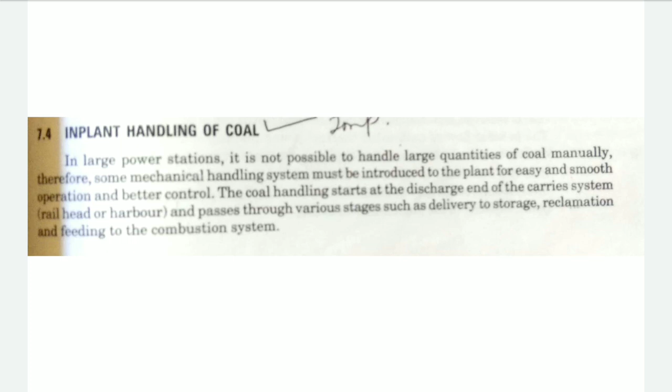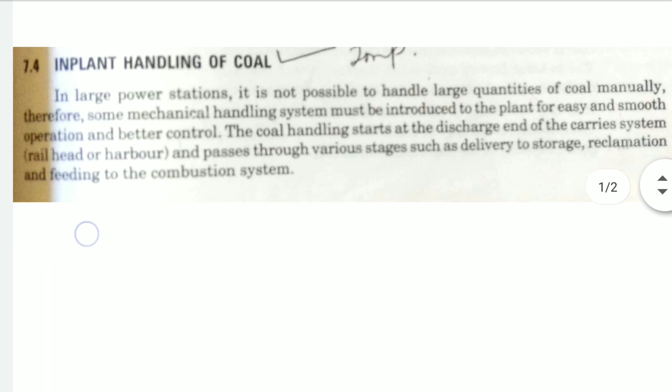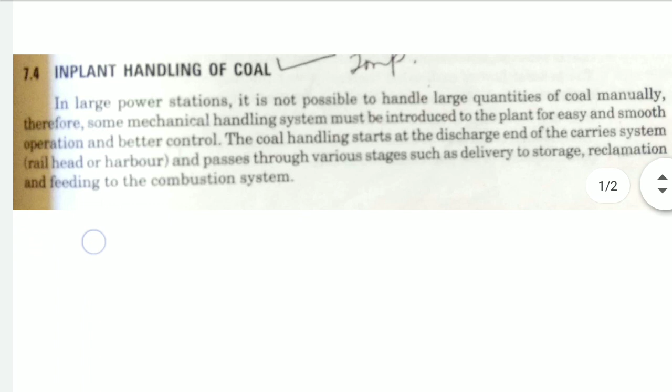In a large power station, it is not possible to handle large quantities of coal manually, so mechanical systems are introduced for easy, smooth operation and better control. The coal handling starts at the discharge end of the carrier system, rail head or harbor, and passes through various stages such as delivery to storage, reclamation and feeding to the combustion system.

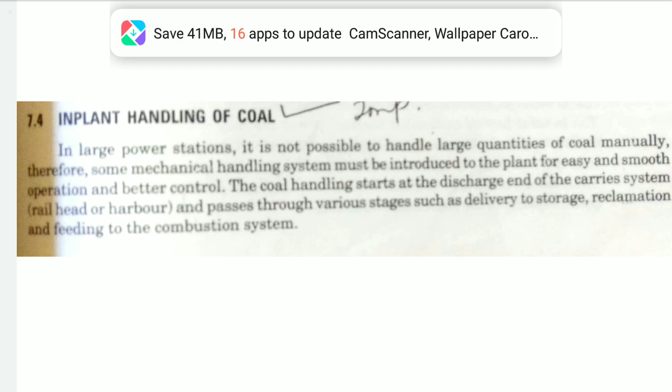Right from the mining there will be transportation for handling - this can be called outplant handling, like by railways, shipping, trucks, or piping. These are the carriers for transportation up to the thermal power plants, and from there the in-plant handling of coal starts, that is storage. For up to a 500 megawatt steam power plant, standby units of coal are required, meaning coal storage is also important as far as handling is concerned.

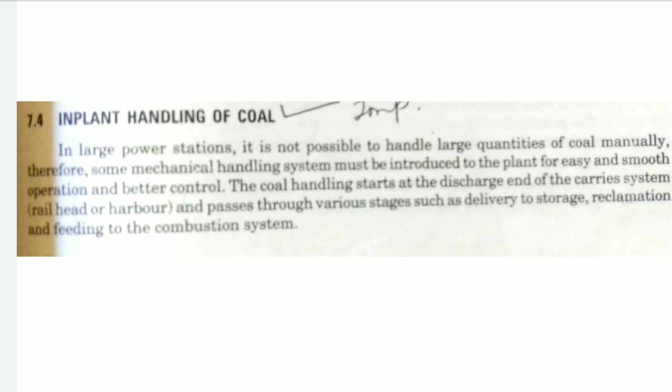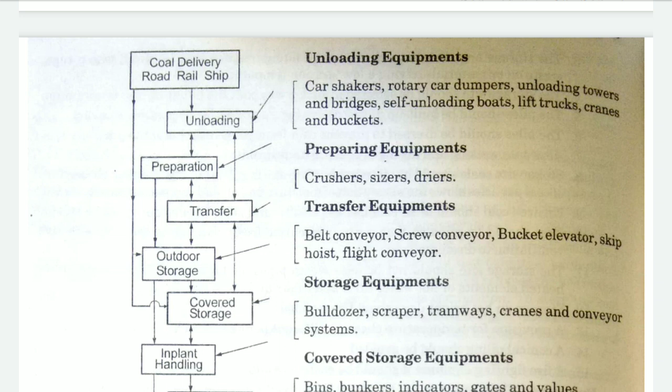After unloading there is preparation equipment to get the proper size of coal for burning purposes - crushers, sizers, dryers - because coal from the mining carries dust particles, unburnt particles, solid particles and moisture. This should be removed, and the large quantity or mass of coal is also not required in such high quantity, so crushers, sizers and dryers are used for preparation of the coal.

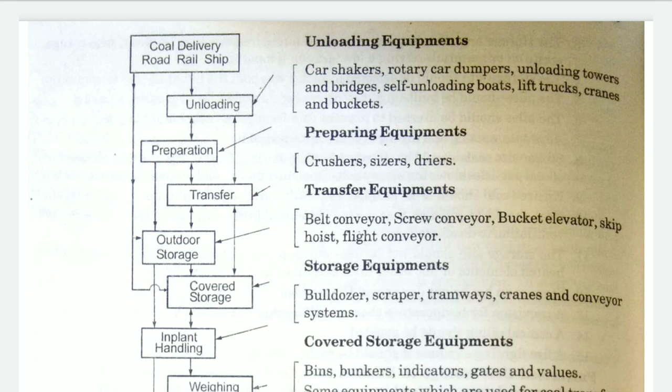After that there is transportation from the unloading site to the storage site. This is done using belt conveyors, screw conveyors, bucket elevators, skip hoists, and flight conveyors - these are the types of conveyors used for transportation. Generally belt conveyors and screw conveyors are much easier for transporting coal from the unloading site to the storage site.

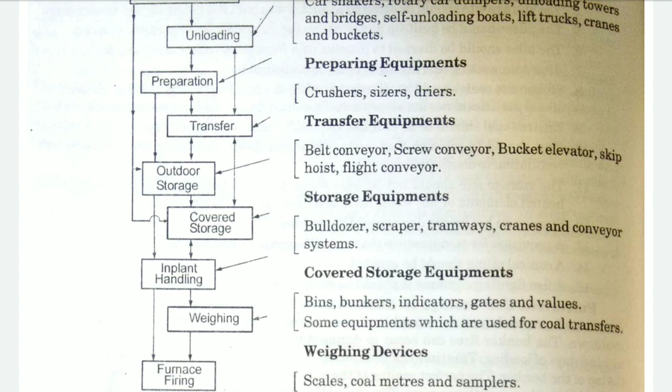Storage of coal can be done using bulldozers, scrapers, tramways, cranes and conveyor systems. Storage may be on open space, or you can store the fuel, that is coal, in covered storage. Bins, bunkers, indicators, gates and valves - equipment used for coal transfer - may also be used for covered storage.

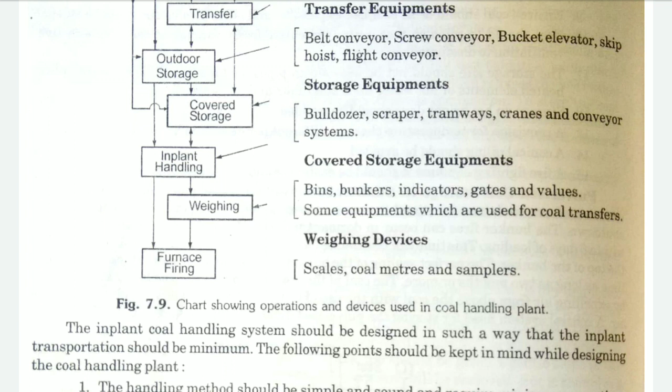After covered storage there is weighing of the coal with the help of scales, coal meters and samplers, because the size of the coal particles should be minimized or pulverized so it will completely burn when fed to the furnace. Our motive is complete burning of the coal in the furnace for high rate capacity.

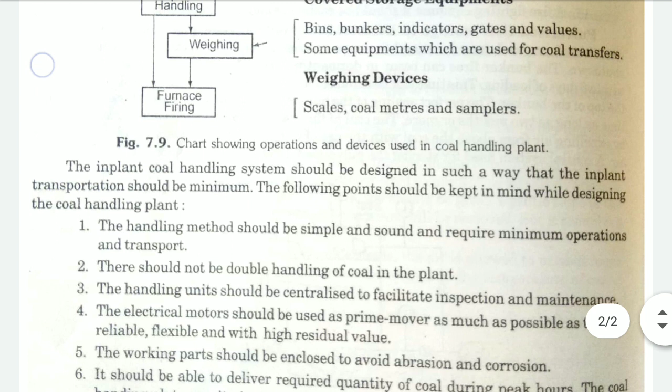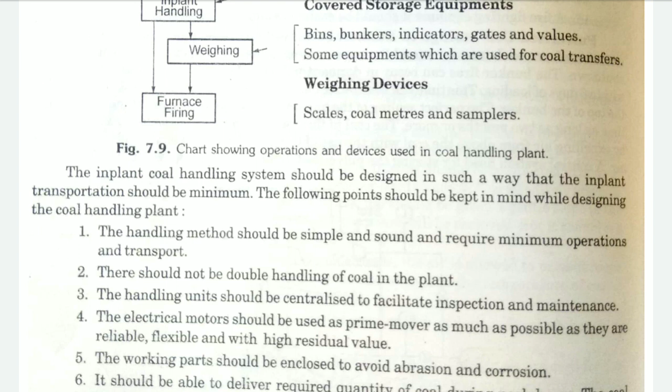So the in-plant coal handling system should be designed such that the in-plant transportation is minimum - this is one key thing to keep in mind. The following points are important while designing the coal handling plant, some of which I will study here.

The handling method should be simple and sound, requiring minimum operation and transport, right from unloading up to feeding the furnace. It should require minimum operations of transportation and handling of that particular coal.

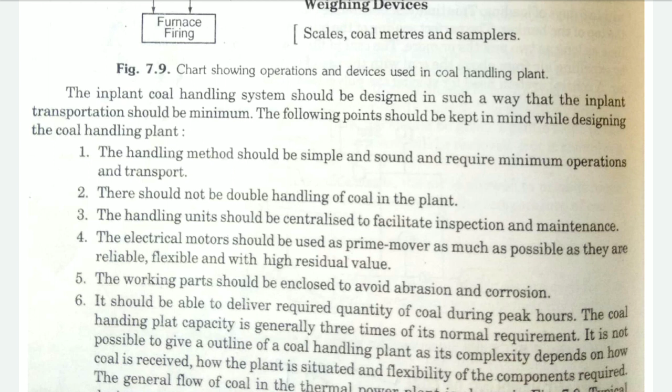There should not be double handling of coal in the plant, meaning the same coal should not be handled twice. The handling unit should be centralized to facilitate inspection and maintenance - all equipment used in the coal handling system should be centralized for easy maintenance and inspection.

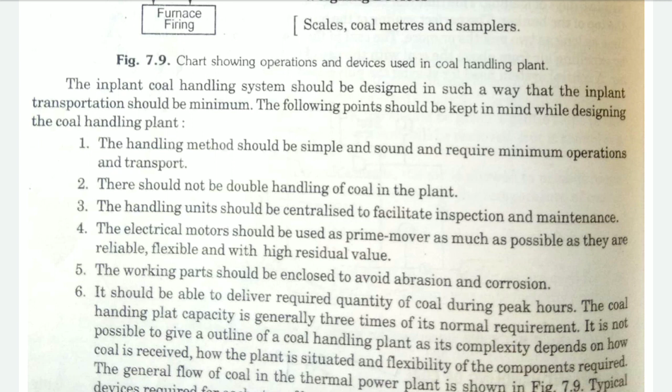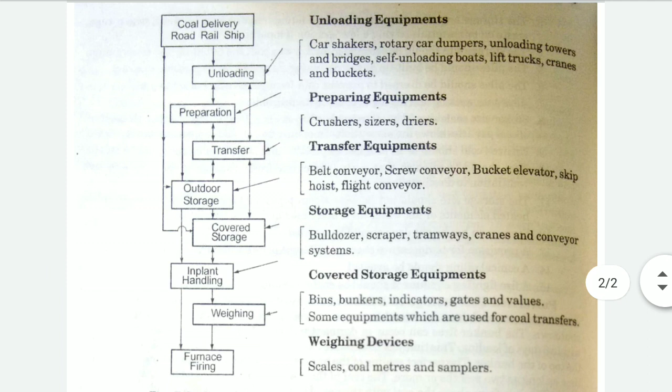Electrical motors should be used as prime movers as much as possible, as they are reliable, flexible, and have high residual values. Working parts should be enclosed to avoid abrasion and corrosion. These are some important points regarding the coal handling plant, from unloading up to feeding the furnace. This is all about the coal handling system. Thank you.